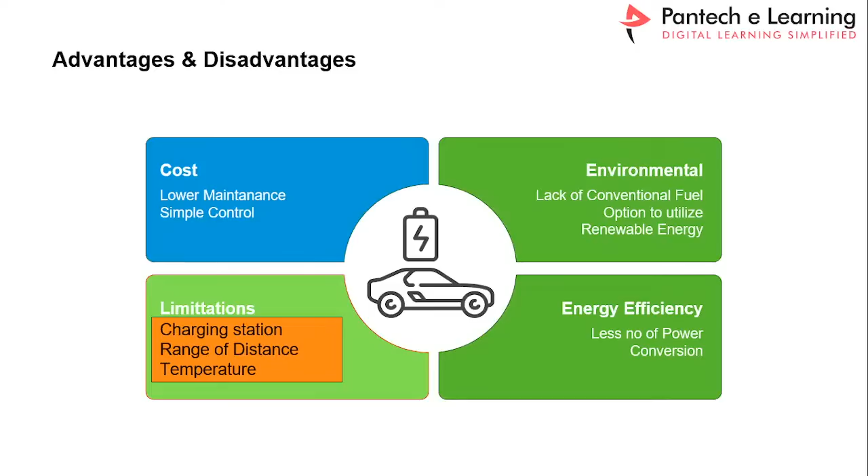But it's not yet in the market, it's still at the research level. So now, how to start, where to start the EV design? First you should understand the theoretical concepts, then verify them with simulation, and finally verify with hardware. Once the hardware is validated, then only you can go for production.

Since you all come from various domains, here we are going to understand the stages of EV production. Initially they will develop theoretical concepts, which is nothing but the specification level - whether it's a two-wheeler, three-wheeler, a 1,000 kg vehicle or 2,000 kg vehicle, the range of distance coverage, temperature specifications, vehicle dimensions, everything. So here we will discuss all these concepts.

Once the theoretical concept has been finalized, we move into the simulation level. There are a variety of softwares available to verify the formulas we developed theoretically. We use MATLAB Simulink, which is widely used to validate electrical concepts, algorithm concepts, and physical concepts - the real-time mechanical parameters taken into consideration. That is called system level simulation.

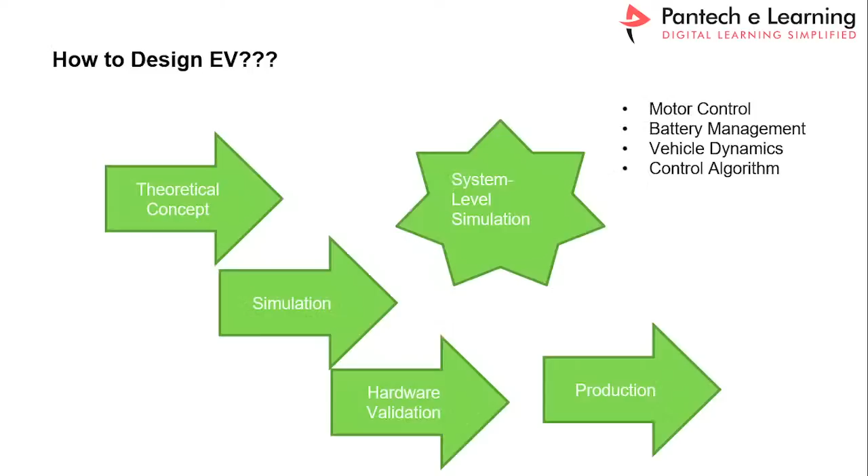This is called MATLAB software. With MATLAB software we can implement all kinds of electrical as well as mechanical concepts. The biggest advantage in MATLAB is you don't need to write any C level programming, any kind of code. Everything is available as block sets.

With the help of block sets, you simply take a block and connect them together, then you can easily solve particular equations. For example, if you take C equals A plus B, you can take a block for C, and blocks for A and B. If you interconnect them together, you will get the answer for that solution. That's how MATLAB provides complete solutions. MATLAB is a computer software that you can easily download from Google, and they provide a trial version.

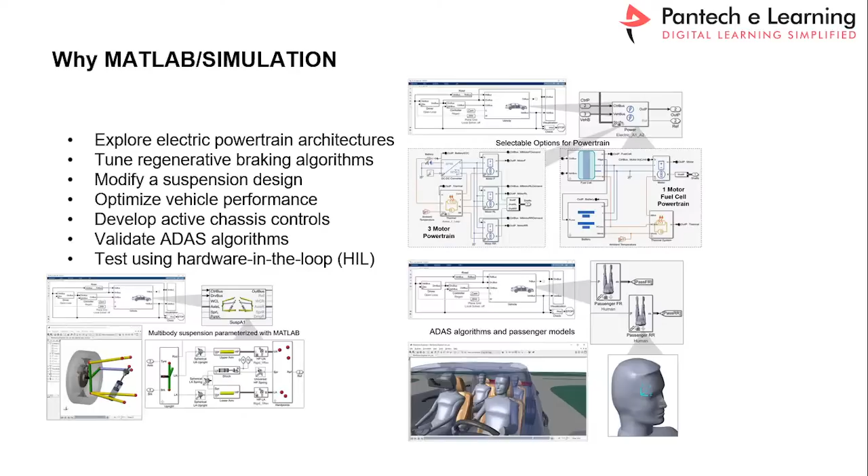If you know MATLAB, you can implement the complete powertrain architecture, implement the vehicle, and analyze vehicle performance for various conditions. You can implement ADAS algorithms, since nowadays all vehicles come with ADAS concepts. You can implement your own algorithms and download the same algorithm into hardware. That kind of hardware is also available, and the software will support that.

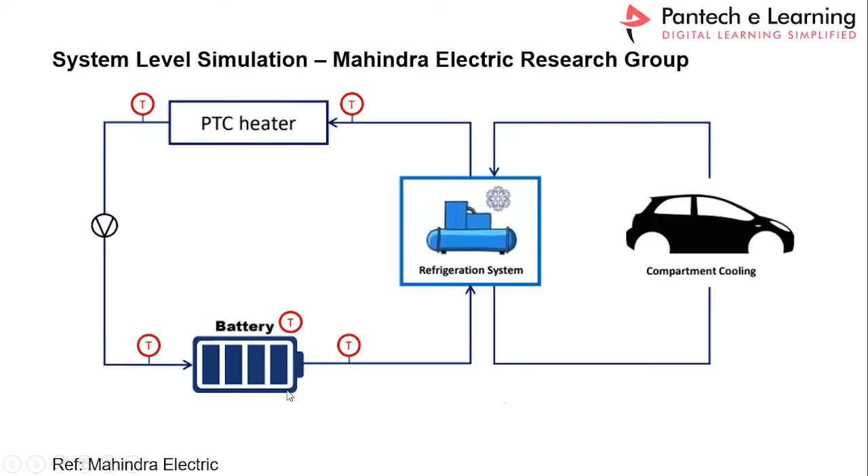This is the integrated system. Each and every physical model can be implemented in the Simulink model. We take a resistance and ambient capacitance between the two layers. Similarly, when current flows, there will be a fringing effect, and due to this fringing effect, the inductive parameter will also exist during operation.

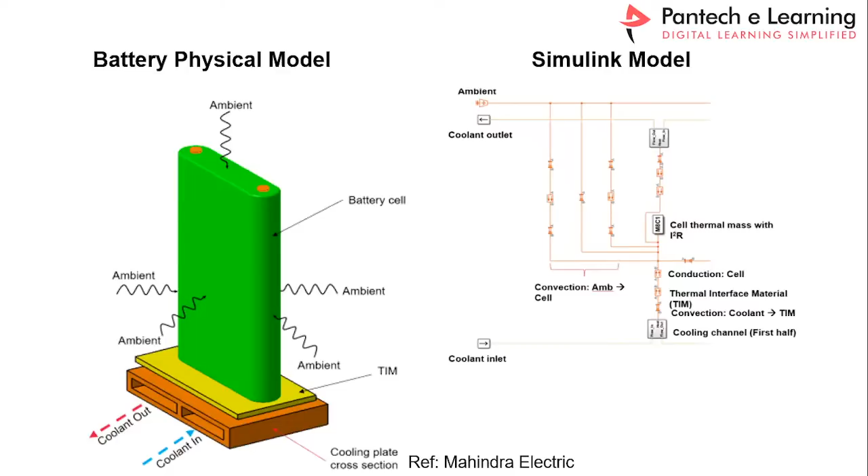This case study has been verified by Mahindra Electric Research Group, located in Chennai. They have released this result, and based on this only, I have selected it.

I personally suggest to everyone, if you are an engineering student, if you know MATLAB, then you will get a job in the EV industry. That's why I suggest you personally.

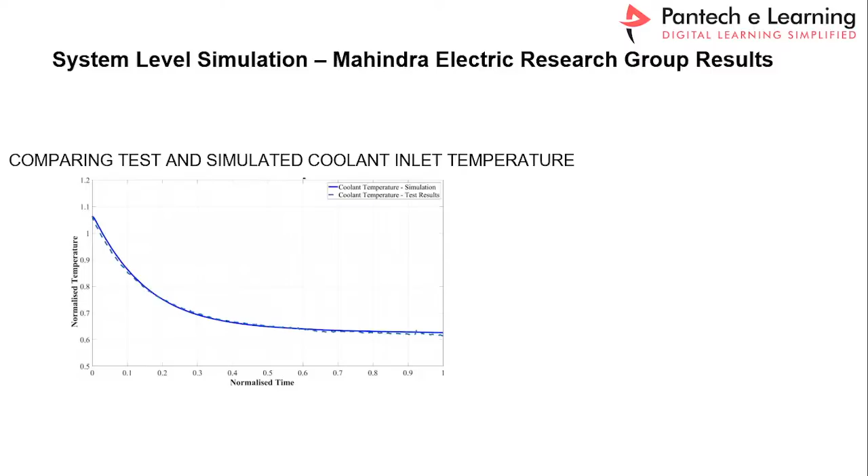My objective is that after this 30 days, you will develop this similar kind of EV entire system, and you can verify the output. Are you ready to learn these concepts?

If you are ready to learn the concepts, please comment in the comment box. I am ready. Thank you, participants. Yes, I am ready, thank you.

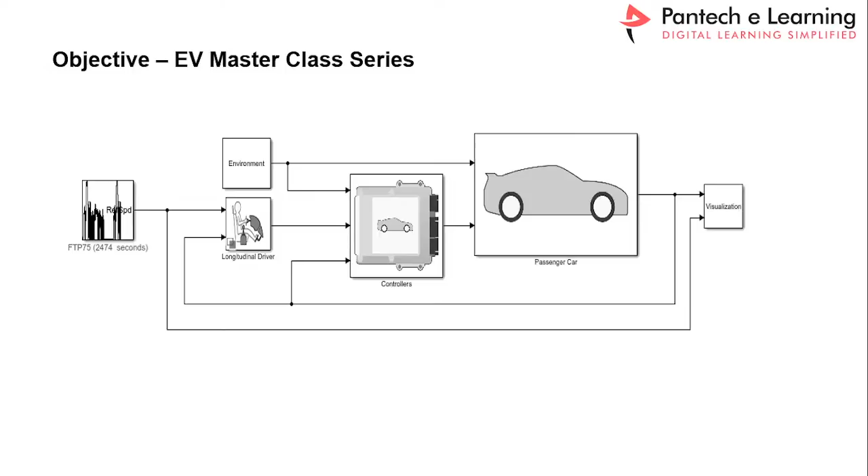Now, as I told you earlier, first what we have to do is the dynamic analysis, that is the theoretical concept. First we have to collect the specifications of the vehicle. So how can we develop the specifications, the theoretical concepts? See here, I will tell you.

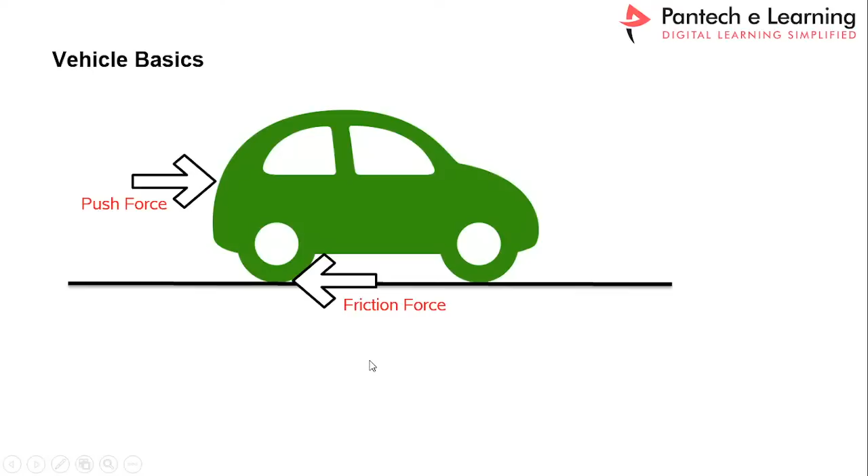So now we have to identify what are all the friction forces. Let us take them one by one. The friction force is nothing but the gravitational force due to body weight and the aerodynamic drag force. Now, if the vehicle moves in the forward direction, due to the air density, the aerodynamic drag force will be generated. That can be calculated with the help of vehicle specifications.

If you go in detail, all the opposite forces to the vehicle direction, you can call tractive forces, or total tractive force. So now you have to identify what is the total tractive force and the vehicle velocity.

The vehicle velocity is, suppose, if you assume that my vehicle should run at 40 kilometers per hour, or 100 kilometers per hour, or 200 kilometers per hour, that is the specification. If you are going to buy any new vehicle, the people will tell you my vehicle will reach 100 kilometers per hour at steady state conditions, and it will reach that within a fraction of seconds, or 5 seconds, or 10 seconds. That is called a specification.

That speed is called the velocity of the vehicle, measured in kilometers per hour. So you can choose your own specifications. I will tell you how to select all the details, all the parameters. Now let us calculate one by one the total tractive forces and then the velocity of the vehicle.

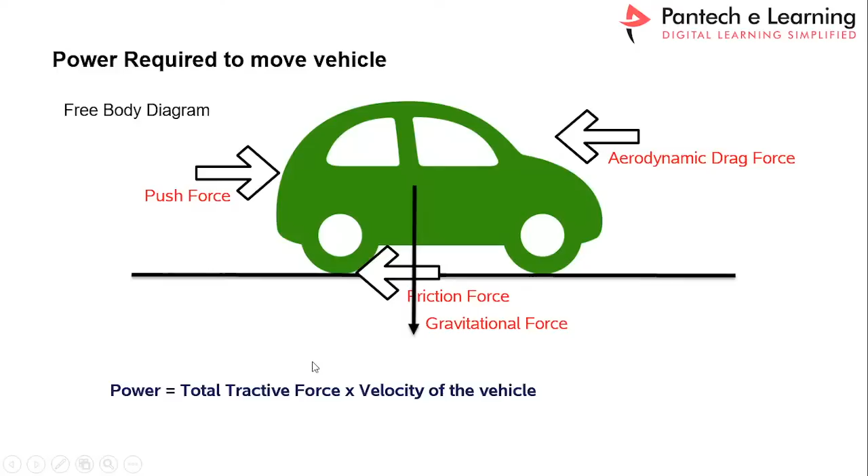Each of these forces we can calculate accurately and apply the values to achieve the motor power. Once you get the total tractive force, we can multiply the total tractive force with velocity of the vehicle, then we can reach the motor power requirement. If you know the motor power requirement, simply you can go and buy the motor which is available in the market, plug it into your vehicle, and your vehicle is ready to run with electrical power. That's why we call it the simplest concept, simplest control compared to IC engines. So to reach that level, you should calculate all the forces.

Let us take one by one. What is the rolling resistance force? The rolling resistance force is nothing but the opposite force, created due to the friction effect between the tire and the road. If any two objects meet together, there will be friction. Since the vehicle tire will be at high speed, like 2000 or 3000 RPM, obviously friction may exist.

So we have to calculate. There is a formula called mu RR into M into G. The mu RR is called the rolling resistance constant. Based on the tire material and tire-road combination, we can choose this range. For example, if you classify your vehicle, there's passenger vehicle, goods carrier vehicle, off-road vehicle, on-road vehicles - these are the classifications of vehicle type.

Depends on the conditions. For example, if you take an off-road vehicle, the rolling resistance constant will be high. Whereas on a smooth road, if you are driving your vehicle on the concrete road, there are no frictions, so smoothly the vehicle will get to travel.

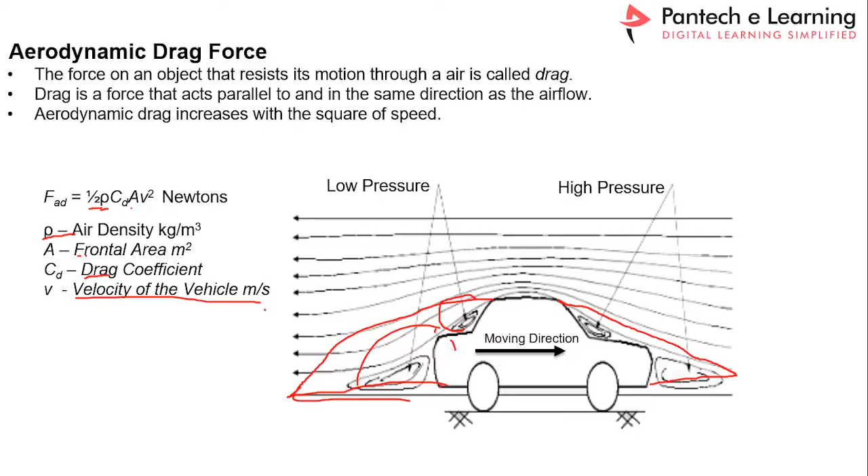For the aerodynamic drag force formula, the coefficient is constant, rho is also constant - the air density - so this is going to be a constant. A is nothing but the frontal area, that is width multiplied by height, and drag coefficient, which is also a constant. Based on the vehicle design, you will get this value. Then velocity of the vehicle - what is the maximum velocity or maximum speed of your vehicle - that is the velocity of the vehicle. If you add all together, you get the aerodynamic drag force. You can choose the drag coefficient based on the vehicle structure.

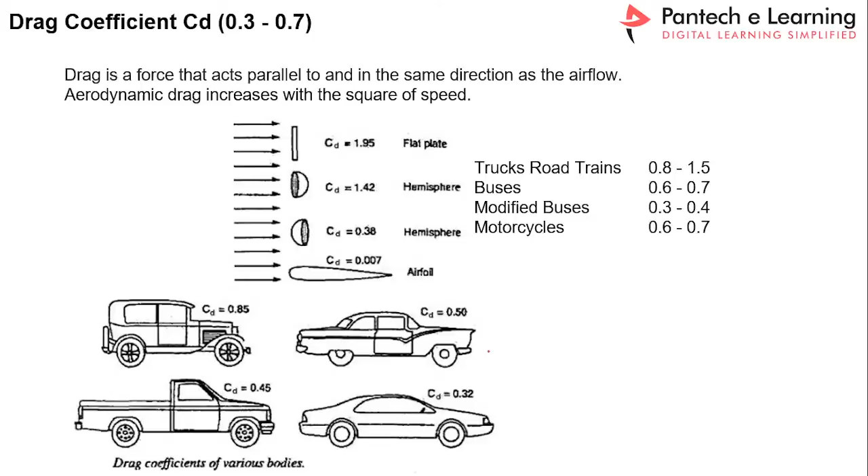And the hill climbing force - here the next one is the hill climbing force. Since our road system is not common, the road system is not a flat surface.

Sometimes it will be down, sometimes it will be high. So when the vehicle is on a down gradient, the motor power requirement may be very less. Whereas if it is an up gradient, or a vehicle on a hillside, then you need more power to overcome the inclination path. So in those conditions, you have to calculate that too.

So like that you have to calculate the total force required to cover this inclination path.

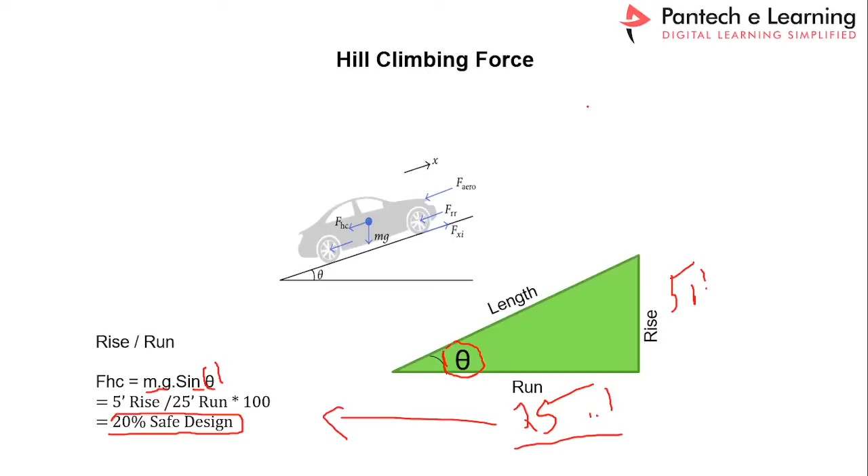And again one more force is there, that is called acceleration. There are two accelerations, one is linear and the other is angular acceleration. I will cover that on day 4, because that requires more calculations for acceleration force. So that part I will explain with calculations.

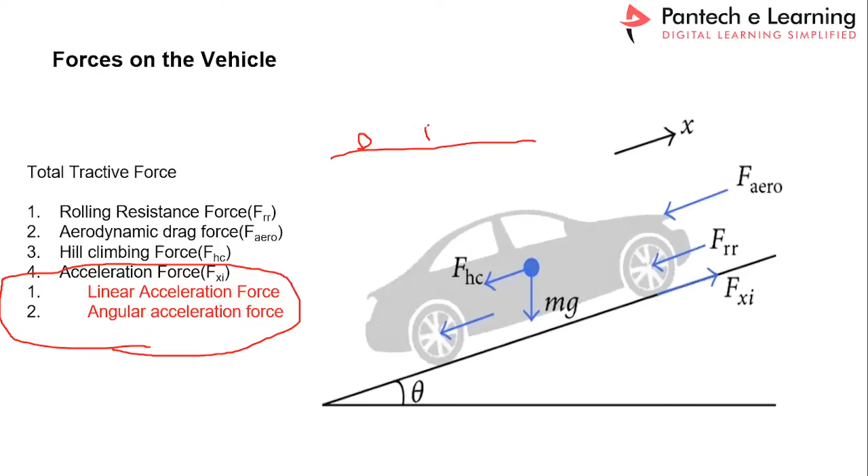So now we can move to how to calculate the motor power alone. Let us assume that we are going to park the vehicle on a flat surface. So like that we can assume the conditions, right?

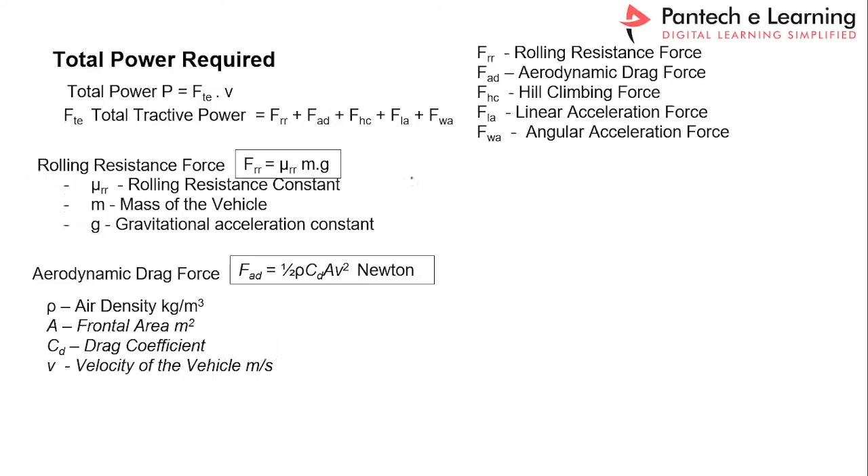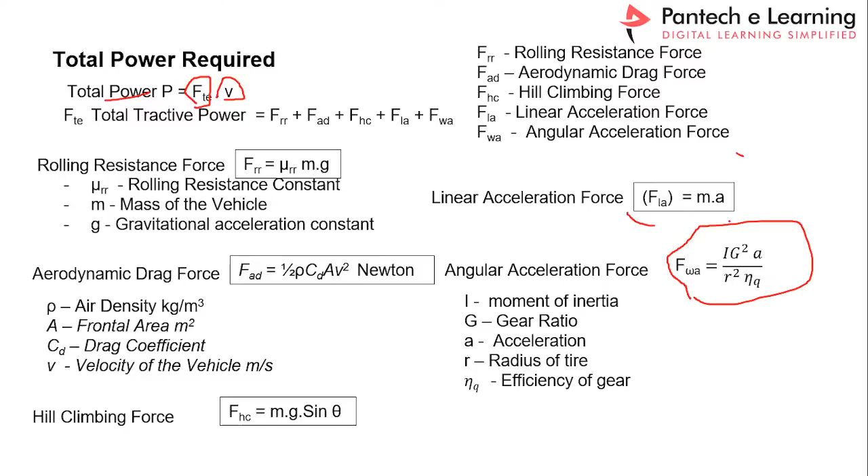So if you add all the total forces multiplied by V, then you may get the total power. So each and everything will have its own calculation. Similarly for angular acceleration, just take this formula alone. I will tell you on day 4 how we are achieving these calculations, right?

Now let us take typical data: 1000 kilogram weight, width is 1 meter, height is 1.5 meter, and rolling resistance - we assume these are all assumption values. Rolling resistance, air density, drag coefficient, and gravitational force - these are all assumed values. These parameters are going to decide your vehicle specifications, right?

And another data is called vehicle velocity, that is the maximum speed of your vehicle. So the maximum speed of your vehicle is 40 kilometer per hour. If you convert the speed into velocity, that is kilometer per hour, you convert it to meter per second. So you have to convert kilometer to meter and hour into second. If you convert this, you will get 11.11 meter per second.

And then frontal area - if you multiply width and height, you will get the frontal area, right? So here we assumed that we are going to park our vehicle on a flat surface. So now the hill climbing and acceleration force we will consider in the fourth session. So now we will take only the first two parameters, that is rolling resistance force and aerodynamic force. This is for simplicity and understanding purpose; for actual purposes we have to take two more forces - hill climbing force and acceleration force.

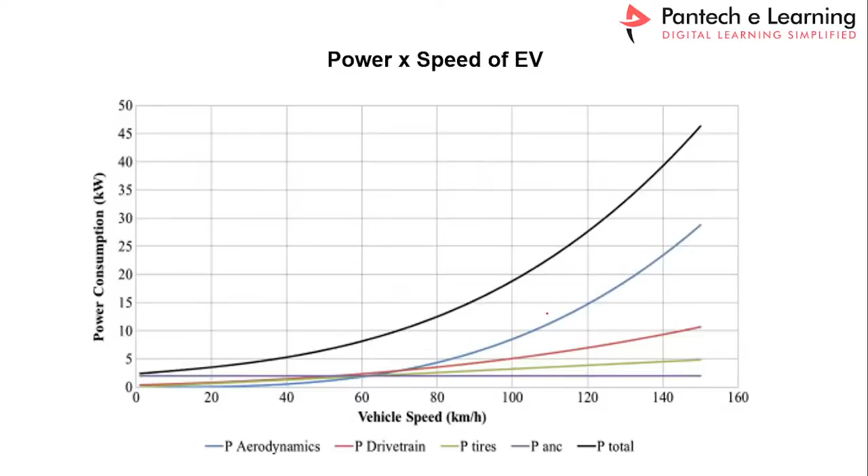If you change the velocity, this graph and all I will tell you later. Actually today I think time is over, so we will cover things one by one. Try to engage with the entire class.

So this is sample data. If you take the sample data, you will get detailed explanations. I already modeled this one due to non-availability of time, since time is very limited, so I took this simple example.

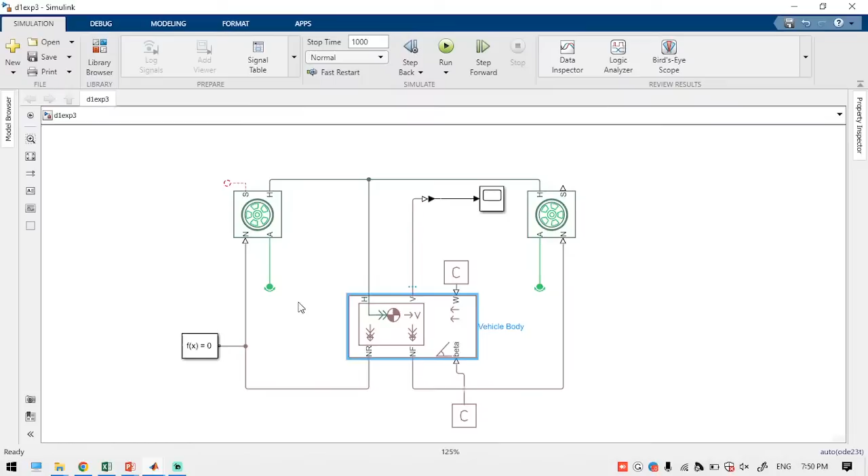In the next class, I will tell you step by step explanations of how we can add this value to each and every block, and how we can run this one. So this is called the vehicle body.

In the Matlab Simulink, see here, this is Matlab. If you open the Matlab software, you will get a window like this. And here in this window, there is a block called the Simulink block. If you click this Simulink, you will get a window like this.

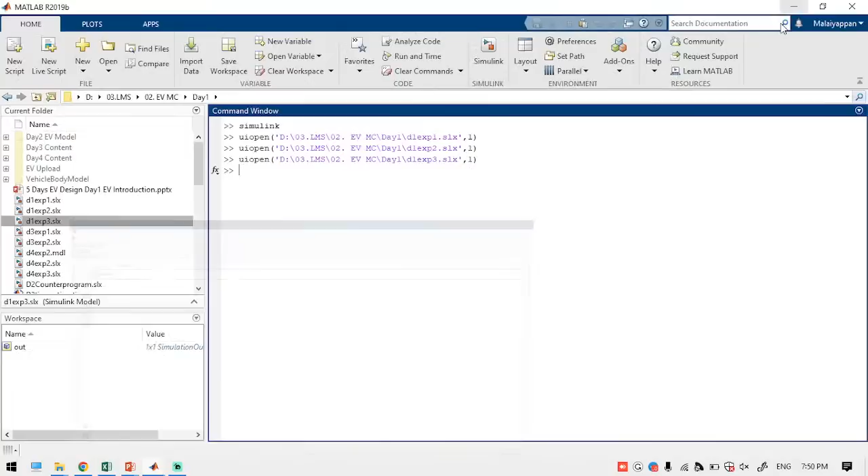And here you have to create a new block. Once the block is created, you will get a window like this.

As I already told you, if you have any mathematical equations, you have a block to solve the equation particularly, so here you may get all the blocks. See here, this is the library blocks, called the library browser. So here you can identify all the blocks.

Now we want to model one EV structure, that is, without motor. We are going to just model one EV structure, which means vehicle body and tires, and then we are going to connect them.

Whenever I access my Matlab, that buffering is happening. So sorry for this.

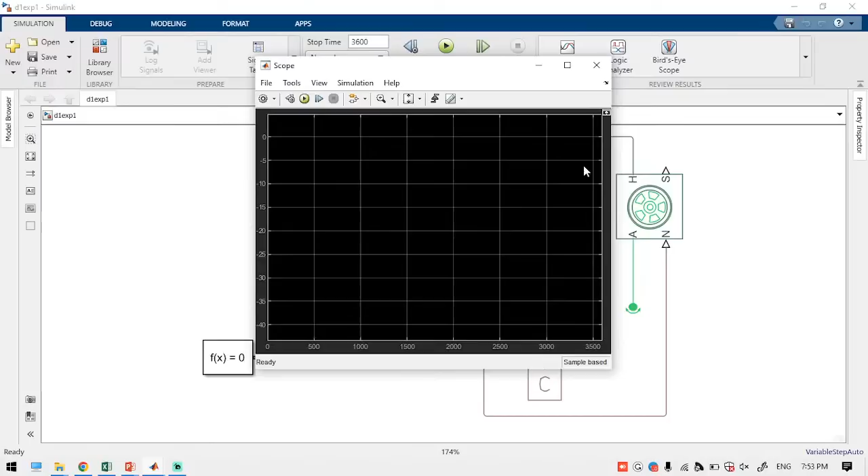Sorry for this buffering. Yeah, time is over. Yeah, I know, I know. So actually, I will teach you how to develop a model like this, how you can do the result, how you can verify the results. So everything I will tell you. My intention is to give you the complete insights about the concept, but due to the internet buffering, I'm going to wind up the session now.

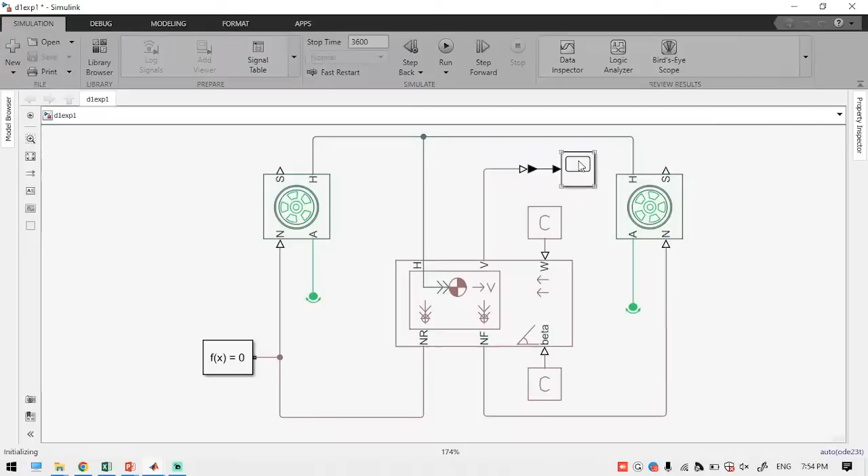So once you model this body, then you can run this vehicle and you can verify the results. You can verify the results at this level. Here, how we can verify the results, there are multiple solutions.

See here, this is the speed which is in the negative direction. The speed is in the negative direction. I will tell you why it is in the negative direction.

Similarly, how we can be modeled. See here, this is the vehicle body, connected with two tires: one is the frontal tire and another one is the rear wheel tire. This is the rear wheel tire and this is the hub, so you can connect the tire with the vehicle body hub. The hub H denotes that hub, and similarly this is the rear wheel axis and the front wheel axis. This is the measurement of vehicle velocity, that is the body velocity, which we can measure with the help of the scope.

And these two parameters are called wind input and gradient input. So the gradient input, here manually we are providing the input. The gradient is as per our conditions, as we assumed the vehicle is without motor; the vehicle will have only the body and then the tire.

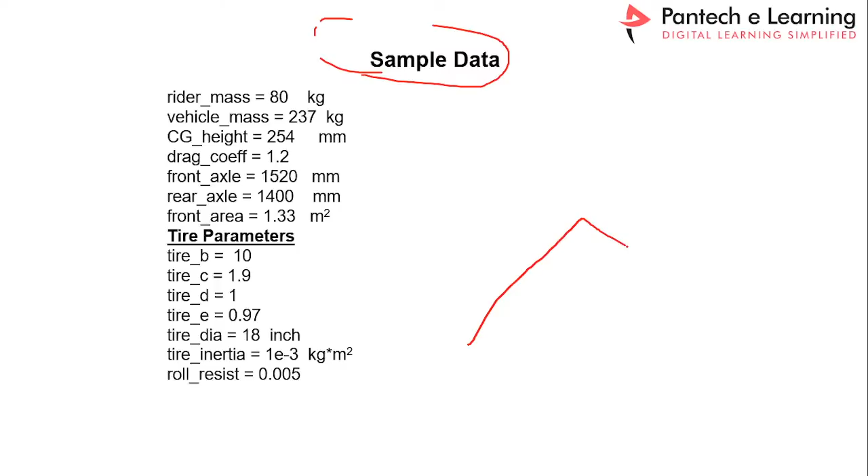Now we can test the vehicle in two cases: one is the upward direction and another one is the downward direction. So if you keep the vehicle at this position, the vehicle will move in the reverse direction. Similarly, if you keep the vehicle in the forward direction, the vehicle will move in the forward direction. This is called the reverse direction, and this is called the forward direction.

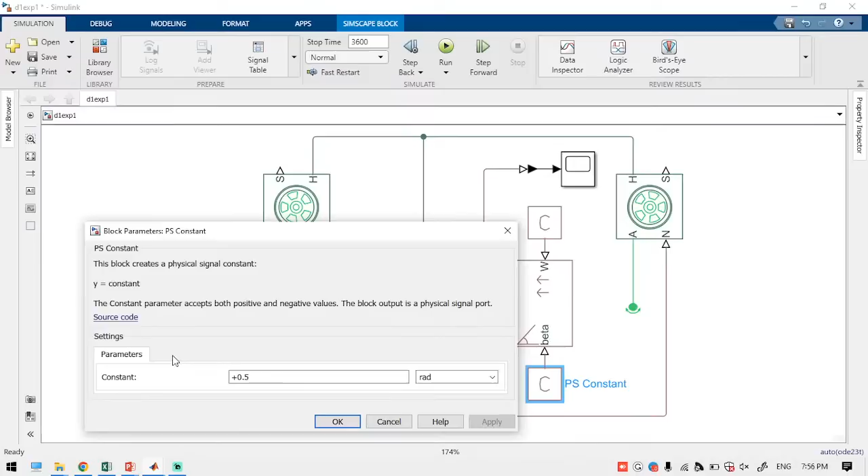So that's why we are getting this one. This is called the upward direction, and if you keep the value in the negative slope, then the vehicle will be in the forward direction.